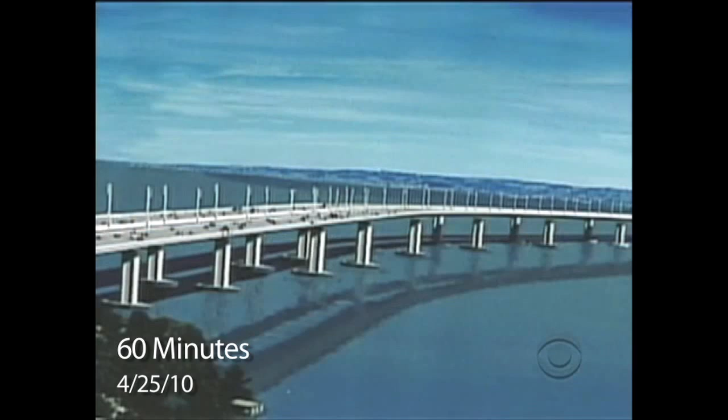Help me understand why it was so important to people here that the bridge look nice. Whatever we built out there would have to meet very exacting seismic standards. Whatever we built would have cost billions of dollars. So why not build something beautiful? Why not build something inspiring?

That's what we're here to talk about tonight, ladies and gentlemen.

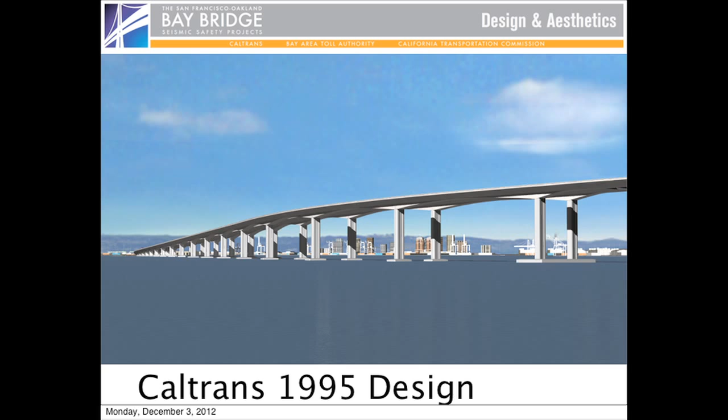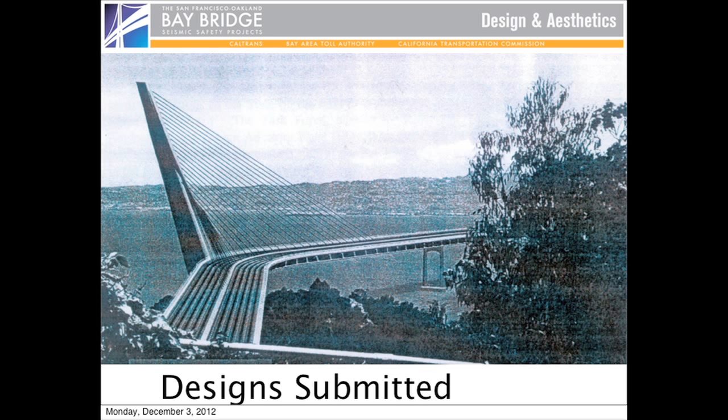Caltrans started getting a lot of designers submitting ideas. This one is from a professor at Berkeley. A lot of the designs I'm going to show you, it's okay to chuckle if you want to, they're kind of funny, but most of them did not work structurally. This one is a very interesting design, but would never work in a high seismic zone.

This is not an alligator, by the way. I think that's Yerba Buena Island. And so I don't know what to say about this one. So we could go to the next one.

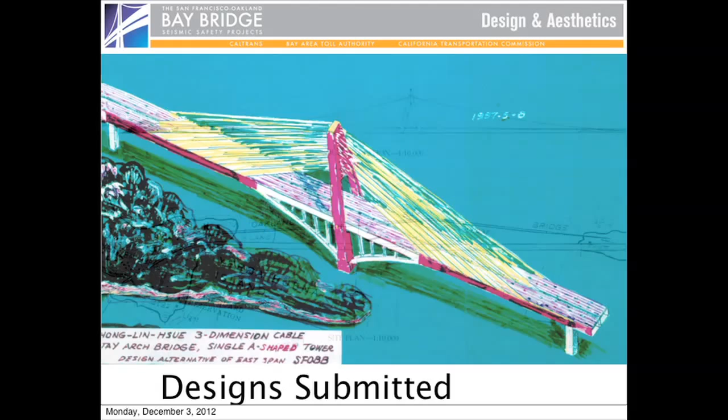This one was very interesting because the designer wanted to put a single tower in the middle of the bay. This is Yerba Buena Island, and this is the west span over here. It's a great idea, but one of the reasons why we have the main span, as you'll see, the main span is right about here, is because the profile of the geography in the bay basically drops off to about 500 feet, and the soils are basically the consistency of motor oil.

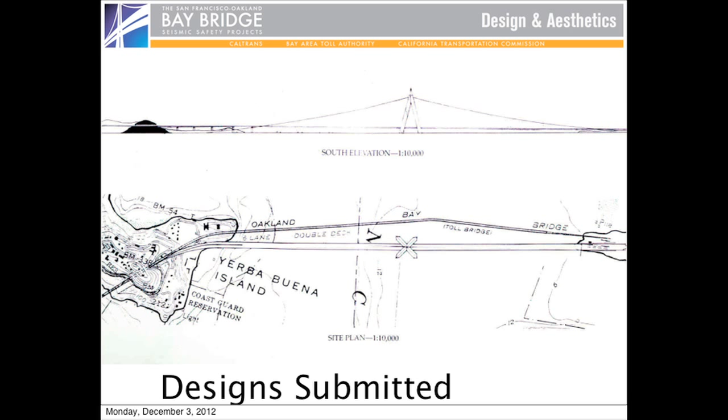The reason why the suspension bridge doesn't go all the way across is because of the geology. The rock profile drops off here, and the main tower is supported in that bedrock. That's one of the reasons for one really large span. A lot of people ask why there wasn't more spans across the bay, and it really has to do with geology. There wasn't really geology to support a mega structure like this. It is actually a nice design, but the geology wouldn't work.

And so Caltrans, we can go to the next slide. Caltrans set up an Engineering Design Advisory Panel, or EDAP. And EDAP came up with 17 recommendations that the designer, whoever Caltrans was going to select, had to satisfy.

I didn't list all 17, but the main ones were that the designer had to have 2 independent designs going on, a cable stay and a self-anchored suspension bridge. Also had to have 2 separate decks. The bridge didn't have to have pedestrian access at that time. Had to be a lifeline structure, which meant within 3 hours after a major event, service vehicles like fire trucks, ambulances, all those sorts of things needed to be able to drive across the bridge.

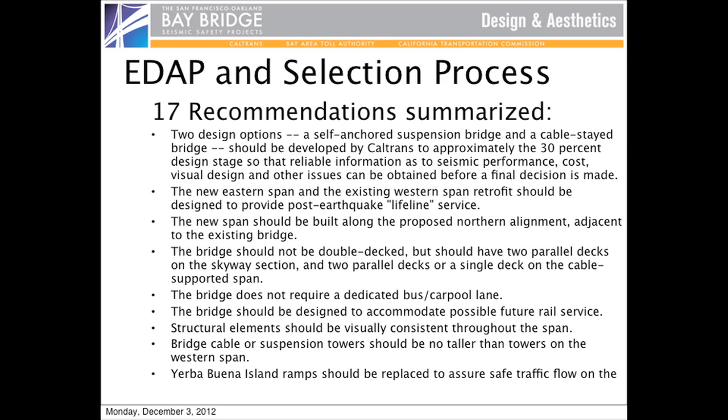It had to be operational after a high seismic event. And the bridge was going to be built to the north, and it also had to accommodate future rail. A lot of people don't know, but the existing bridge was designed in case BART ever went across - it's actually designed to accommodate BART if it needed to be.

How did it work? Well, it's very interesting to know that in 1997 and 1998, when all this was going on, the idea of having architects work on a mega bridge project in the United States really didn't happen. Engineers really liked to have the engineering process that they liked and not have architects come in and kind of muck up the process, and we heard that a lot.

But the way that Caltrans set up the whole process was very context-sensitive design. The Federal Highway Administration had created a program called context-sensitive design, but the Bay Bridge process actually preceded that. What it was is we would have landscape architects, engineers, geologists, lighting designers, environmentalists, all working together to find a solution. A lot of the times, the different professions, the different disciplines had very different ideas of what should be done. And so it became a very interesting process.

The architects, we would come up with some of the crazy things you saw in the beginning, and engineers would come up with things that were not very exciting. And so we were in a constant battle back and forth on how do we come up with the aesthetics.

What I'm going to show you is actually now the development of the cable stay bridge. I'm going to show you from pre-proposal, before the RFP was released, through the proposal images and up to 30% design. So if we can go to the next one, please.

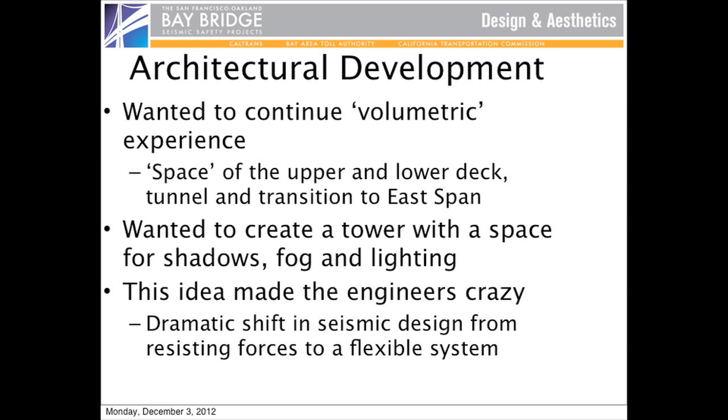I wanted the cable stay bridge to have an experience. If you're driving on the existing Bay Bridge from Oakland into San Francisco, on the top deck, at first you're on the deck, then you're in the truss, then the main span truss, then the tunnel, then the space of the main cables—it's all very interesting. It's a perceived procession of spaces. Going from San Francisco to Oakland otherwise, you're basically in the space of the truss the entire time. You don't really have a great view. Then you're in the tunnel, then on the bottom end of the truss. It's not great. So I wanted to create something that created space.

That was very interesting. I didn't know how that was going to happen. And I also wanted to split the tower so that it had space for shadows, for light, for different effects.

So do something else. And I have to tell you, when I said this to my engineering friends, that we wanted to split the tower in a high seismic zone, the back of their heads popped off. It completely went against all engineering philosophies, where up until then, all structures, especially in California, were built to resist earthquake forces. They're meant to be robust, not flexible.

So what we started to do is we started looking at these things—I didn't know what a ductile link beam was, but the engineers did—coming up with ideas of having these link beams that would allow the structure to be flexible and move. One of the many spectacular things about the Bay Bridge is that it's designed to move and to break, predicting where it breaks in a major event. It's not made to resist everything.

And so from that idea, if we can go to the next slide, these are some of my earlier sketches. I was working for a firm called H2L2 Architects at the time, and if you see the date here, it says December 5th, 1997.

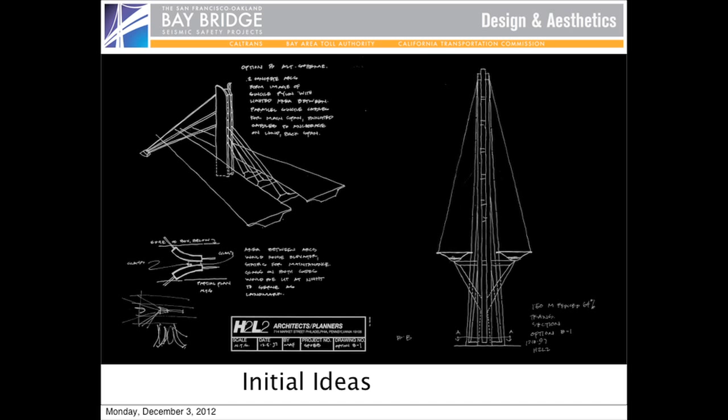This is some of my first sketches on the idea of having the cables in the back span go to the outside, the cables to the inside, and the front go to the inside. This is the west side, this is the east side. So when you came out of the tunnel, you'd be in the space of the cables and they would transition to the front. This idea then translated into something that was split.

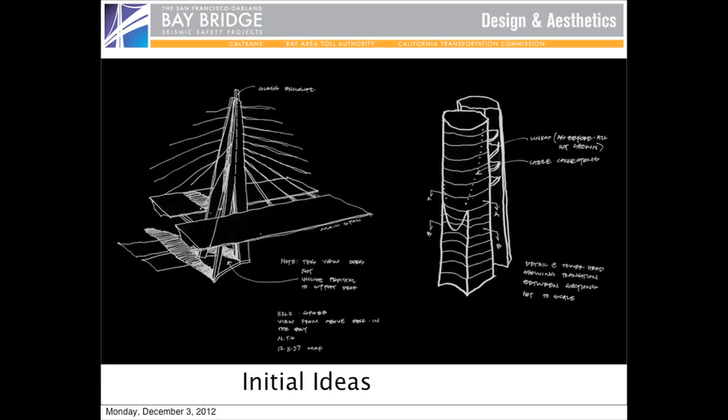I split the legs actually. Can we go to the next slide? The back of the tower had these legs that opened up like this—again this is the west side, this is the east side. The cables came from the outside to the tower and then back into the inside.

I was looking at a lot of different ways to sculpt the tower. These are some early sketches where we were showing some of the link beams, and we had the two halves, shaping the concrete and doing some really interesting things with it. Again, this was a whole six days later—I went from that one sketch to this other sketch, and there's a bunch in between. Can we go to the next one?

How am I doing with time? Am I doing okay? Yeah.

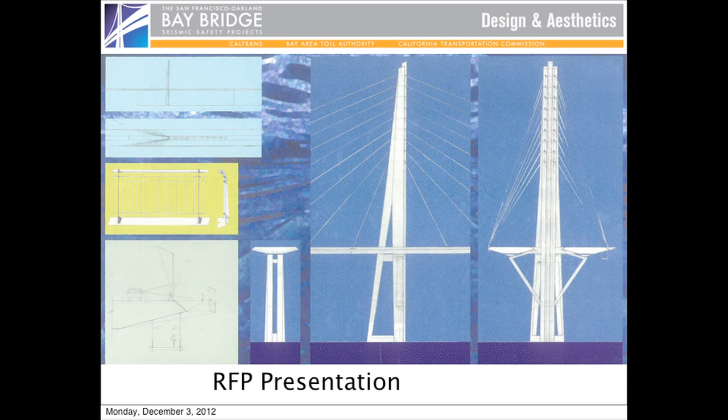Okay, good. So these are actually not many people have seen these. These are actually the presentation boards we used to show to Caltrans when we were presenting our qualifications to be the final designers of the Bay Bridge.

That earlier design developed into the main span tower. This is longitudinal, as if you were driving across it. These are the skyway piers. They were doing studies on where to put the pedestrian path. At an early phase, we were looking at putting it below deck, at deck, or above deck. Don and Clive will talk more about that later.

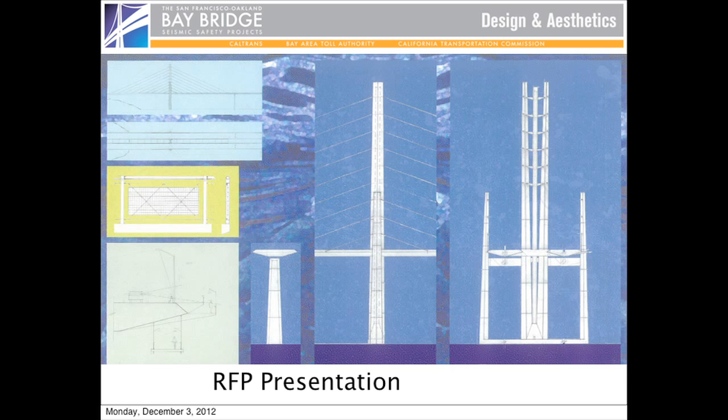So this is how that split tower developed. There's two smaller towers on the outside, two taller towers on the inside. We were playing with different cable arrangements and different things. After that, we were awarded the contract, and we started working on the design.

One of the things we wanted to do is this one, called a portal frame. This is the old engineering, where this structure was designed to resist earthquake forces. It's a very robust structure with 4 planes of cable, with cables from each tower, and each roadway supported independently. It's very robust, but not very attractive. When you have 4 planes of cable like that, the views are distorted, and we felt it wasn't all that great.

You guys have to remember, these graphics are from 1998, so this is a long time ago.

The one I showed you earlier with the split legs, with cables to the outside and then to the inside, those 4 legs — our engineers started looking at that and putting it in a computer model, and it kept blowing up. It did not work at all. The earthquake forces — it just didn't work. So the engineering team said, go back to the drawing board and come up with something else.

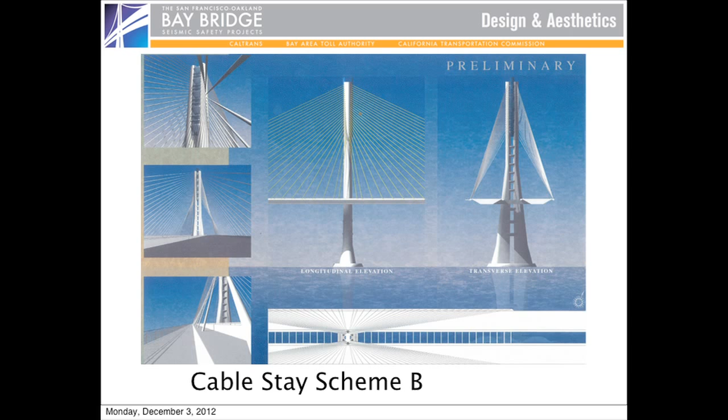So what we started developing was the central tower, and it did what we were looking for. It had the tower in the center and cables to the outside, creating a very dramatic effect. In the very beginning, I always call this one a ballerina with really fat ankles — it's got really chunky proportions, but early on we don't know a lot about the behavior, so the structure is often bulkier and not that graceful.

Thank you, I agree. And then can we go to the next one, please?

This is actually one of the models you didn't see out there. This was the first model of the cable stay like this, and at this stage the ductile link beams were up here, more architectural — they weren't really functioning at all. I had a concern about having these link beams exposed to the elements, out in the rain. So we worked on creating this glass enclosure at the top to close them in. It could be lit at night — really dramatic, really cool.

I remember the press and everything on SF Gate — people were afraid they'd be driving across it in an earthquake and the glass would fall out. I was always like, well, you're not afraid of that when you're walking around the streets in the city, when there's buildings with glass. You know, that doesn't happen.

But that's a model you didn't see out there right now. Can we go to the next one?

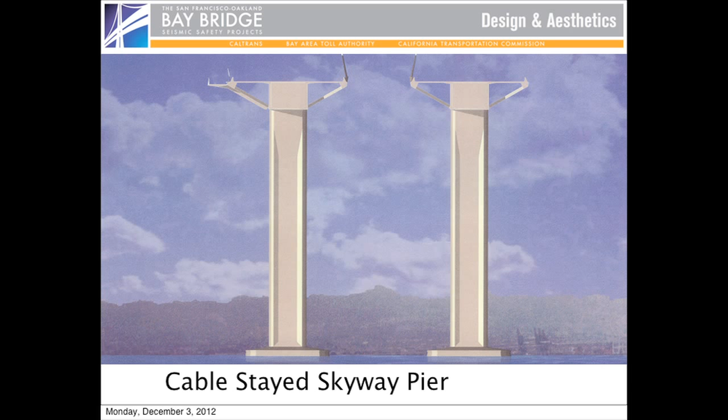We're also developing the Skyway piers, and this is very similar to what the Skyway piers look like today. And then this was the portal.

And we had some reveals along the outside of the concrete that could be lit and create a lot of excitement that way. But in the end, can we go to the next one?

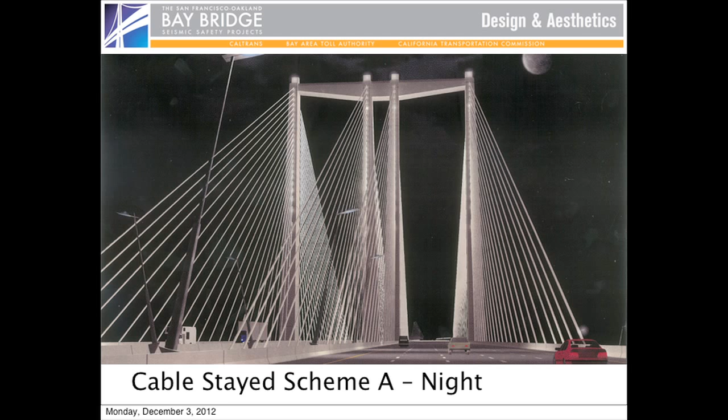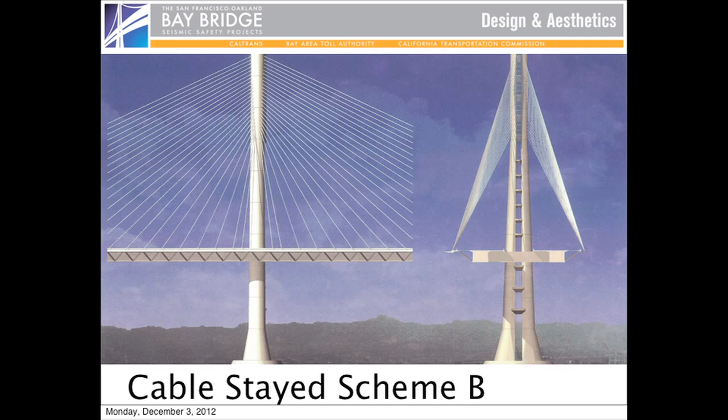There's some night views. So in the end, this is after the central pylon got developed a lot further - you can see how much more slender this is. We started playing with some diagonals, bracing on the exterior. It got a lot thinner. The performance of this tower was extremely efficient, very, very efficient. And this is what it looked like from the deck.

In the very end, we submitted 4 different designs. We had the portal design - let's go to the next one. The self-anchored suspension bridge had another portal design as well. We'll go to the next one. We had the single pylon, and then the self-anchored suspension bridge.

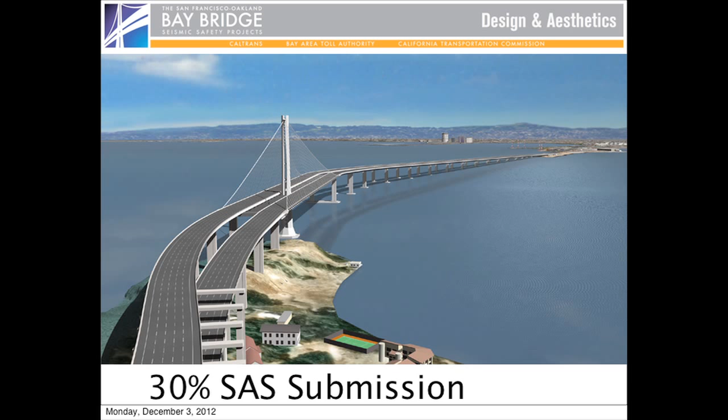And ultimately, at the last - am I almost done? Yep, okay, I'm going to be done now. I didn't even know you snuck up there.

So I'm done, actually. Don and Clive are going to continue talking about the self-anchored suspension bridge. I just wanted to show you a little bit about the early development.

Thanks, Michael Fitzpatrick, for taking us back down memory lane with some of those early designs. First of all, parents, thank you so much for bringing your kids out tonight. Tonight is actually historic - we haven't looked at some of these designs in years. Like I said before, those models haven't been unearthed for a decade. We're kind of retreading some old ground to bring back the Bay Bridge story tonight because we know we're just a few months away from opening this amazing span.

The next 2 folks that are coming up are going to speak specifically about the bridge that was actually built and how we came up with that design. With no further ado, I'd like to turn it over to Clive and Don MacDonald.

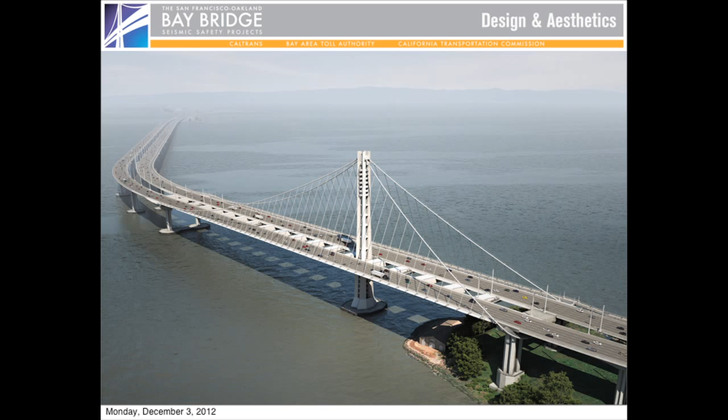Here you go, and I think this is a good overview of the whole bridge. It was from touchdown to tunnel - that was the idea, to make the bridge read as one piece. There's 5 different parts of this bridge, and those 5 different parts had to be all sort of read as one bridge. So we've done it by the light poles, the tower, and all the solids and voids that are in here.

What's really interesting in design when you design bridges - and I use the Golden Gate as an example - is that the deck's usually about 1/3 of the height of the tower. The reason that's done is when you put the deck in the middle of the tower, it cuts it in half. So this started off with a very good placement of the deck. Throughout the design, you'll see there's 1/3 of the elements at the top, and 2/3 down here - they're not grouped the same way. It's like when you take a photograph and put the horizon in the middle, it splits it in half. This way, it reads as a unit that's harmonic with its total.

In the design, all the elements are interrelated. The 4-legged tower was set up because we wanted to get light through the middle of the tower to break it up, to break the massing down. So we had the slimmest tower possible, and the same with the horizontal elements, to make them very slender. So it's a very small, minimum impact on the environment.

So that's the next slide - this is an animation. Just talking you through it: see the touchdown at the tunnel here, it goes across, the deck splits into 2. Part of the design guideline was to have decks parallel to each other, and then a single tower came out of it.

You can see the link beams that Mike was talking about, and the solids and voids that are matching up with the tower and the deck. Here you can see the pieces of the tower have redundancy—the tower top and link beams are covered with elements that are bigger than what's actually needed, and there's no structural need for it.

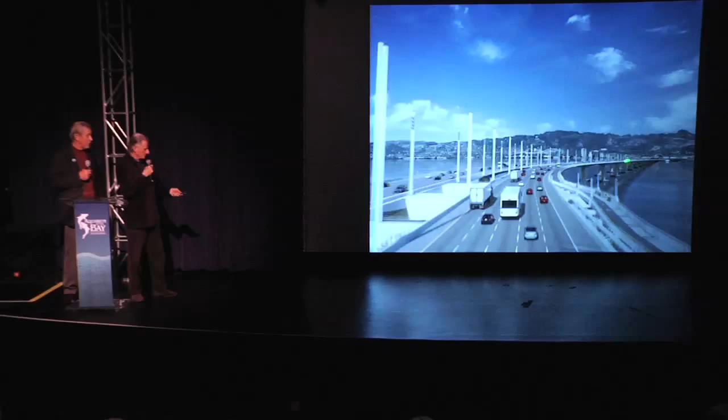Here are the light poles that come into the spread-out cable system, and it's really important that we wanted them to read as a strong line, because it's a design technique we used to get the bridge to read as a unit. Howard Brandston in New York had done a lot of that layout. Here's the added-on bike rail that we put on, and there are a lot of interesting elements on this—I'll get to it when we see more detail.

We tried to center everything on the piers where we could—belvederes, the light poles, and all the elements in the handrail relate to the elements underneath the deck, like cantilever arms. Also, on the piers, the corners have pentagon shapes—the same shapes you see on the main tower, and also in the light poles on the bridge. Those are pentagons as well. So the idea of carrying this vocabulary throughout the bridge has been very important.

I want to first appreciate everybody turning out tonight. You've heard from Michael, and you have Donald and I up here. There's another architect who worked on this bridge, Jay Mirza, that I want to recognize. He worked with us early on the design, not early with Don on the self-anchored suspension span, but he was very involved as the bridge evolved over the first few years, including early on in the skyway portion, which wasn't received very well by the Bay Area. I certainly want to recognize Jay.

Don and I have done a number of these presentations before, so we kind of go back and forth, and I hope it works pretty well for everyone. So, the game plan, if you will...

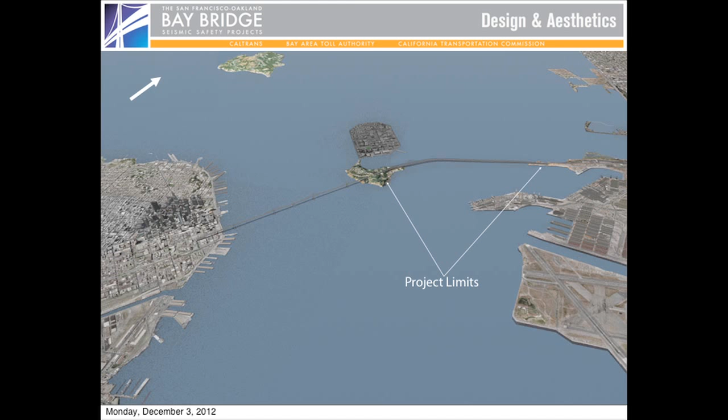I want to take you on a journey across the bridge, and Don and I will do our best to familiarize you with and explain how all these parts come together that Don's been speaking about. I think we all know where the project is—Michael explained it pretty well, but we want to take you on a journey across the bridge. We'll talk about the suspension span first, then the skyway portion, and by the time we're done, you'll have a pretty clear understanding of how this bridge was put together, not only structurally, but how it was shaped and architecturally designed.

We start with this great picture of the Bay Area, showing the rich history of the Bay Area bridges, with an image of the self-anchored suspension span in the foreground, the west spans here to the left leading into San Francisco, and the Golden Gate to the west. The point of this slide is to talk about—Michael did a great job explaining some of the early designs we looked at in the design process—but how did we really get to the self-anchored suspension span? Don, maybe you want to get into that.

I think what's interesting is that there's a necklace of bridges here, and they're catenary forms. A catenary form is like if you hold a string between your two fingers and give it some slack—that's called a catenary form. So we have this element that ties all the bridges together as the main thing. The other thing is the tower height is the same as the tower height on the west spans, and the idea behind that was to tie that in as well. So it's a good way to see how important this bridge is. Part of what we're pushing lately is the fact that it becomes a bridge for the East Bay, particularly Oakland—we'll get into that a bit further down the line.

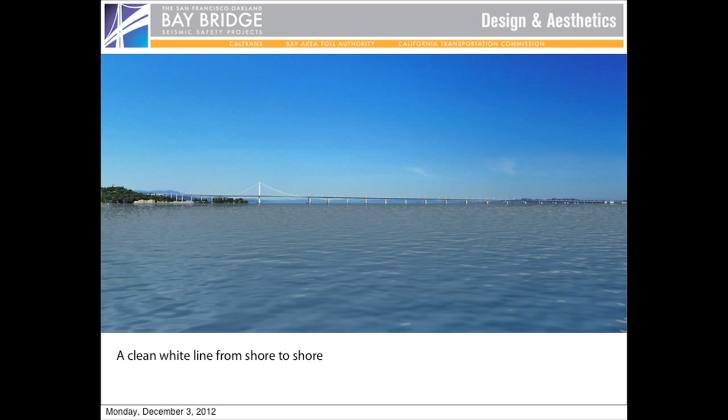This is about the horizontality and the vertical tower. If you look at nature, basically everything's horizontal—horizons and trees are vertical, even buildings—so there's a certain nomenclature that exists. The other interesting thing is this bridge rises: the deepest part of the underside of the water is at this end, and it rises from there, so it sort of mimics what's underneath it.

And this tower was moved earlier in our design to be over a better rock bed that's underneath it. These piers that go down, they go down about 300 feet in stiff mud. I think we have slides that explain that even better, why the tower was moved where it is.

I want to mention just the bullet down below. A clean white line from shore to shore was always kind of a design parameter for this bridge from day one, to create this clean white line from shore to shore. So that's been the challenge architecturally.

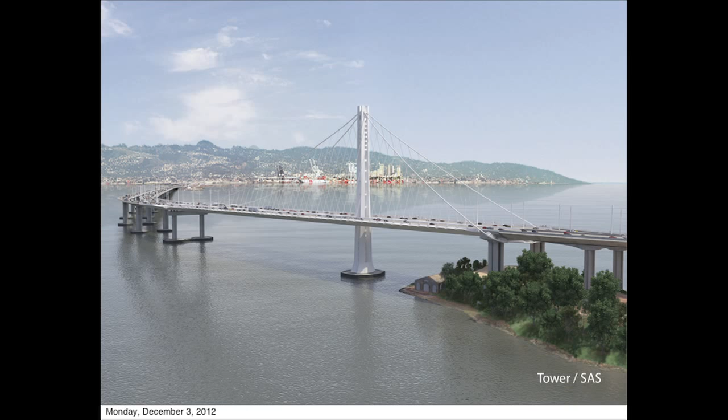So this image is to talk then, we're going to start with the tower. A great image of the tower to explain to you how the tower evolved into the shape and form that it is. Not only the tower itself, but the catenary form of the suspension span. So Don, you can speak to this slide and probably the next few.

I think the idea, as I mentioned earlier, was to set up a vocabulary for the bridge. One of the ways we do it is we take the tower in this particular case, which is the most complicated piece of engineering out there. I worked very closely with Herb Rothman. He and I together created this tower. I would do a sketch and I'd say, Herb, does this thing work? And he'd say, yeah, let's go with it. That evolved from other designs you'll see in a minute, other sections through the tower.

The other thing that's very interesting about this is it's a self-anchored suspension bridge. The forces come down the cable, go into the deck, parallel to the deck. There's two components, a vertical and a horizontal vector. When you get down here, the vertical drops out, then it goes into compression. On the back, they couldn't get that design completely on that system, so they weighted it down with concrete. The element below it is to hold it in place in case of an earthquake. So you can get an idea that this is balanced, even though the distances are different.

The other thing is it's about a 1,000-foot span, and that's a span you need for boats, ships, I should say. If you make it any smaller, then only one at a time can go through it. So that was another reason the span was important.

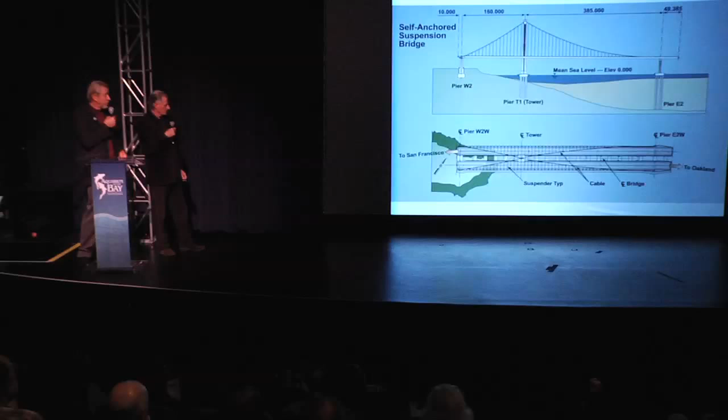The other important thing you see here is that the bridge, as it is in the current design, is asymmetrical in form. Early in that design process, the single tower suspension span was symmetrical, Don, as I recall. Right. And we moved forward with this design. I think it's a good point to bring up EDAP, which is a committee that was our peer review panel. They suggested we move it back. It'd be a more dramatic form, but also it'd create a foundation that was more stable.

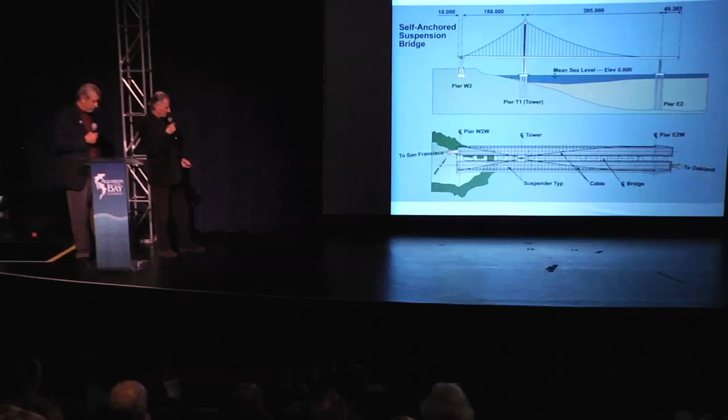Out here, as I mentioned, these piers go into stiff mud. They go down 300 feet. And there's an old riverbed out here, and that's why it has a different configuration than the more shallow place. Here you can see how it hits the island.

This is just cut off, but the earlier designs, the reason we had two towers to begin with was the idea was to set the elevation on this one lower than this one, because when you go off the bridge, they wanted the roads to come together, and they wanted to start that difference in the bridge.

So that was one of the reasons we had these 2 towers in the earlier designs. We did about 15 different tower designs and about 10 cable systems before we came up with this final solution.

Next. I think what's interesting is once they moved the tower back, it picked up the cranes in Oakland. The cranes are white, and this is actually a catenary form. There's not much of a curve in it, and then there's a backstay, and that sort of repeats its shape in the main span of the bridge.

I think it's really important that these were painted white. I called up the maintenance people and said, why are they white? And they said, because if there's any rusting that goes on, we can see where it's going to happen. And this is the thing.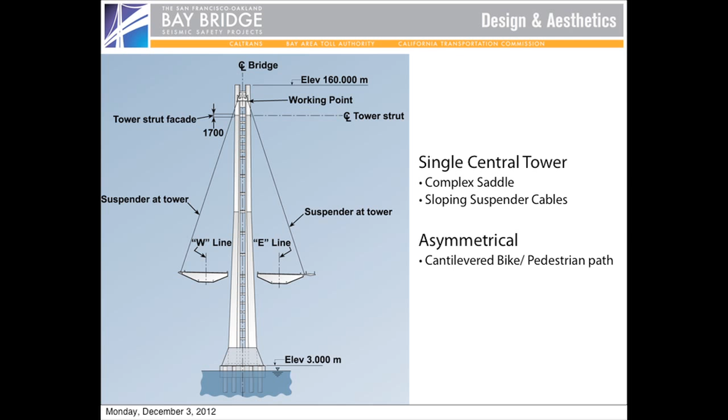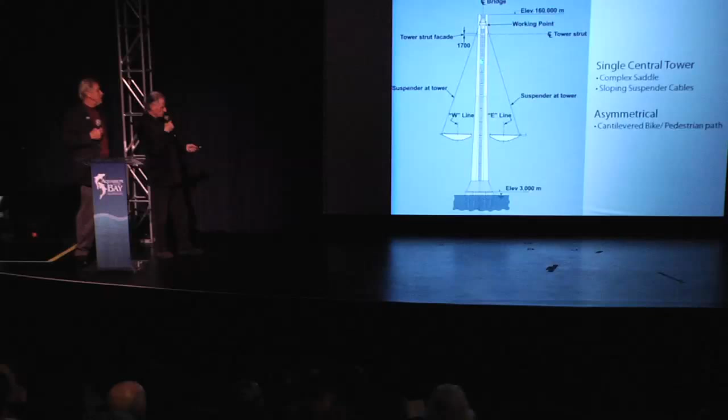Now, I was saying earlier, there's redundant parts on here. The tower top is redundant. It was a termination we designed. And here, these are link beams. These are the actual size of the link beams. They're actually, the covers are actually 2/3 bigger than this. We felt the proportion was so small it wasn't significant, so we enlarged them. And then we added a few more down here and a couple at the top.

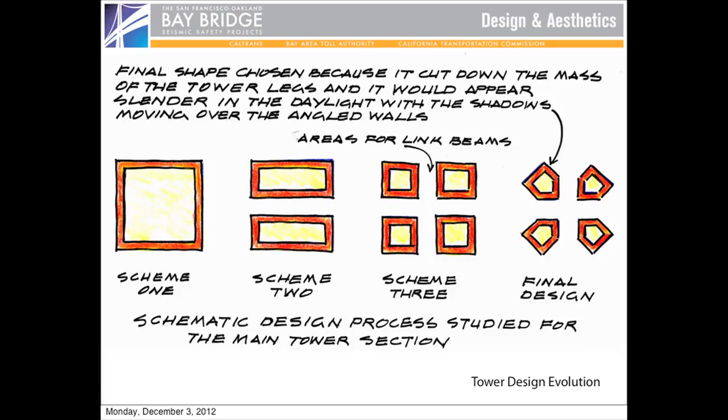Now here's the process we went through. When we first started, we had a sort of square tower. We actually had some in concrete. Then it got split into 2, like Michael was saying. They started looking at 2. And then we got it into 4. And then I felt at the time it was still too big and clumsy, so I started cutting the corners off. And again, I turned to Herb after I'd done the drawing. I said, Herb, is it going to work? He said, okay. So that's how it ended up there.

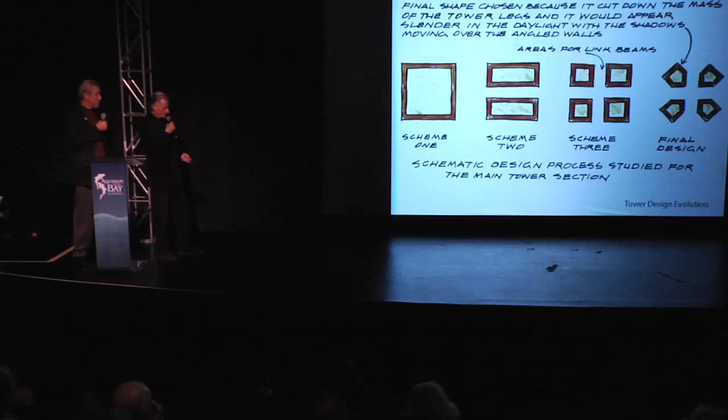Next. These are the kind of drawings we do, by the way, when we work with engineers. We rough them up, sketch them up. We don't do computer drawings till they sort of decide what they want, and then we go into 3D and fly-throughs and all that. But this is a process we've developed in our office over the last, because of the Bay Bridge, 15 years ago. And we even carried this faceted form into the railing design of the bike path, which we'll talk about shortly.

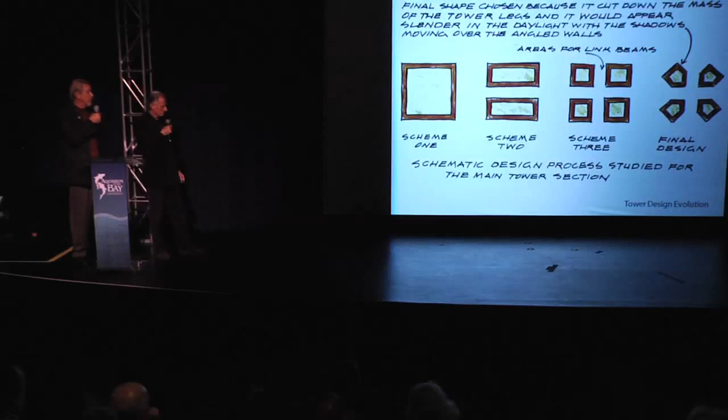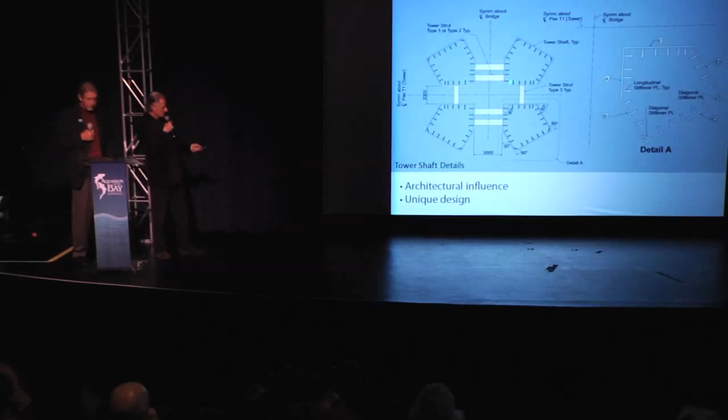This shows you in detail how this is the tower leg itself. These are the link beams, or struts - there's different names, we call them link beams. And these are the outside skin, and these are the stiffeners on the inside of the tower. So they're hollow, and they're tapered as they go all the way up.

And the reason we tapered the tower, not just for structural reasons, but if you look at the Golden Gate Bridge, or many of the famous bridges, the towers always taper as they go up or they step up. The reason for that is when your eye looks at 2 parallel lines at great heights, they sort of spread out because of the optical aspects of the lens. So the idea is to try to pull it in as it rises, and that also makes it look higher than it really is.

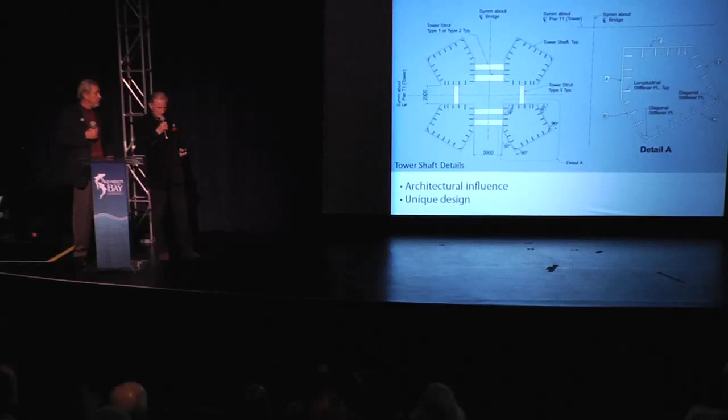And I just add to that, since we're talking about Don's sketches, as I work in the day-to-day kind of design theater, if you will, of this bridge, because it feels like theater a lot of the time, there's times where we're trying to convince our engineers. And I can't say enough about toll bridge design, the engineers I work with from Caltrans, from our consultants, from our partners, MTC, CTC, and I really mean it.

It's just a great team of people to work with. It's like a family after 16 years. I don't know if it feels like a family to Don, but some of my family is here. They would probably agree that I spend too much time with this family instead of at home.

My point earlier was that there's times we really do want to drive home a point, and I call Don, and Don and I meet on a weekly basis, and I say, Don, I need a sketch, man. And he cranks these out pretty fast. So it's a great part of our dynamics, if you will, and it's very productive.

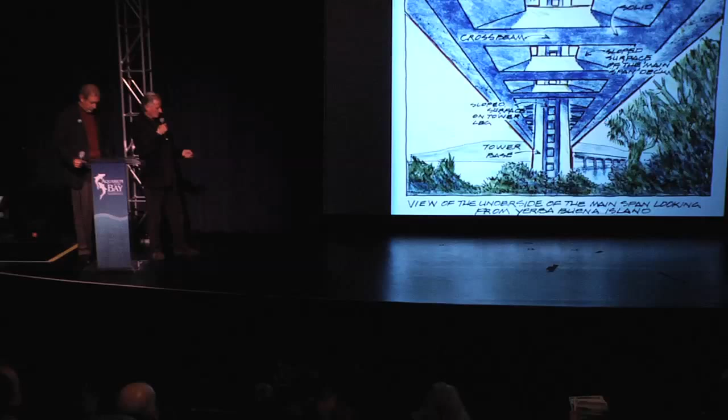Now, this is an important part. Remember I was saying earlier, I'll talk in some detail. These are the rods that come down and tie this back part of the bridge. All it does is stabilize it in case there's an earthquake.

The other thing that's quite interesting, Bart alluded to, is that this bridge has a lot of innovation. This is the first cable that I know of that wraps around the bridge itself. We pulled the bike rail off so people could look at how the cable goes into this saddle. There's a saddle here, another here, one here, one at the top, and then two more on the east end of the anchorage.

We also lifted the bike path up, so there's an airspace underneath it. The theory was that when winds come in and blow, they'll go underneath and around it, like an airplane wing—this sort of looks like a U-2. The idea was to get that path separate from the autos, because there's a tremendous amount of cars, and car exhaust is heavier than air, so we felt it'd be some treatment. We don't know if it'll work, but at least we're going to try it, and it's the first time I know it's been done.

This is the tower again, and the link beams, and the redundant top, and the covers on the link beams are redundant because you can't see the actual working piece of structure. Here you can see where we used the pentagon on the columns, and there's a negative space here that ties in with the tower. So again, it was bringing the solids and voids together, as you can see, and that helps tie a uniform structure together.

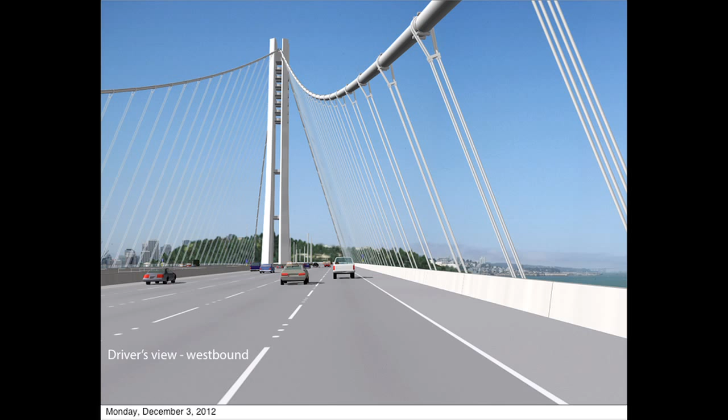Next, you're on a car westbound coming into the tunnel, and this shows you the barriers. It also shows the link beams, and this is the main cable. These are suspenders, and this cable is wrapped, like the Golden Gate Bridge cable. It has 137 strands, each strand has 127 wires, and there's 17,000 total. It's a major feat, and it carries the whole bridge.

Around the tower base, there's a big void, and that's in case of an earthquake so the deck can move back and forth without hitting the tower. It's sort of freestanding here and doesn't attach to the deck, it goes up, and all the forces take place up here and in the base of the tower. Like I mentioned earlier about the tower, why it's so important—here you can see the bike path again, and we'll show you some more pictures.

We have a pattern on it, so the bicycle two-way traffic gets separated from the pedestrian, which is on the outer edge. This is another one, and you can see how the light poles are coming into the sort of open frame. The idea here was to bring these light poles in, so when you're in a car, and you'll see it on the bridge, now they're close enough, so I won't say it's a wall, but it's a transparent sort of white element.

And when you're driving along where you're really next to them, you'll see how this piece goes right into the center of the bridge and the tower.

Things that Clive might talk a bit about the lighting. We've got 7 fixtures on the last light poles, and there's 7 elements up here. So as you go through the light poles, they go 3, 4, 5, 6, and 7, and then that ties it into the top piece. Again, I mentioned we work in thirds all the time when we can. This is a third of the height of the tower, and these light poles are a third of the whole light post itself. We will talk a lot more about lighting.

Let me add right here, kind of moving through this journey, the idea was to communicate how the main tower works, how the main span works, but then once you understand the architecture, that architectural vocabulary, all that is carried into the rest of the bridge. So the point of this slide, the challenge architecturally was that this bridge is made up of a number of different structure types.

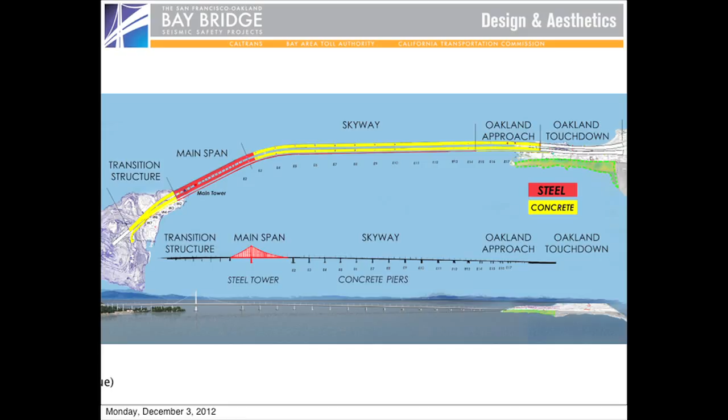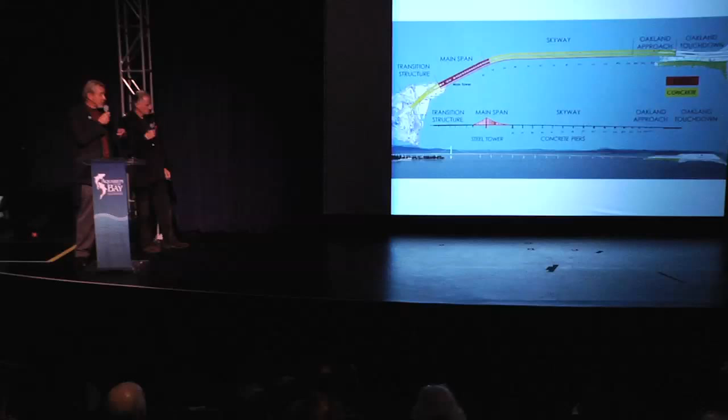This is the steel main span, or SAS, that we just described. Then there's the main approach viaduct, which we refer to as the Skyway, which is actually a segmentally constructed concrete structure. Both ends of the bridge, the Oakland touchdown and the YBI transition structure, we'll talk about those as well, but those are cast in place concrete structures. So the challenge architecturally was to provide an architectural solution that unifies these 4 different structure types into one unified whole. I believe we're going to take an aerial view of the Skyway now.

I think I can talk real briefly about it initially. This is the Skyway or viaduct portion. Again, the first thing you notice is it's 2 side-by-side decks that we've talked about earlier. The thing I want to point out is if you think about the current bridge, it's a double-deck structure, and that was a real advantage to this bridge visually, architecturally, and experientially. In other words, when you're on the existing double-deck structure and you're on the lower deck traveling eastbound to Oakland, you're basically in a big steel cage.

You really don't have views out to Oakland East Bay, and you'll see that in the next few slides. But now with the side-by-side structures, that will afford us incredible views towards the East Bay, as well as to the west when you travel westbound. We looked at a number of different alignments for this bridge overall, and we chose this northern alignment, number one, for geology, for foundation reasons, but it also afforded great views traveling westbound towards the north, Mount Tam, the Golden Gate Bridge, the skyline, and so on.

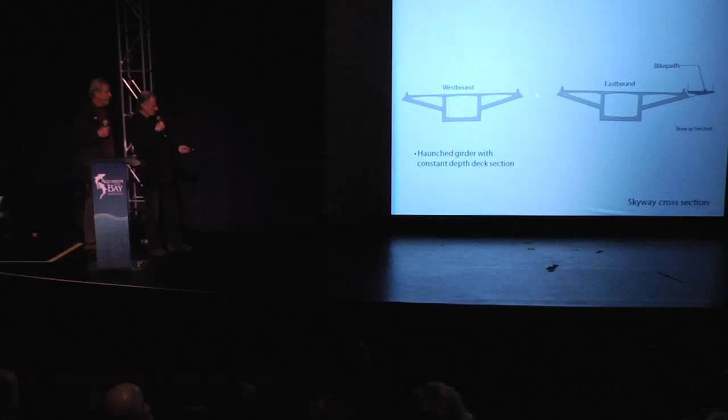Here you can see the bike path, how it's elevated a bit, and it gives you an idea—it's sort of an add-on. On the main span, what's interesting, you can't see here, but they've got ballast on the other side to balance that bike path. So, yeah, here's the pier again.

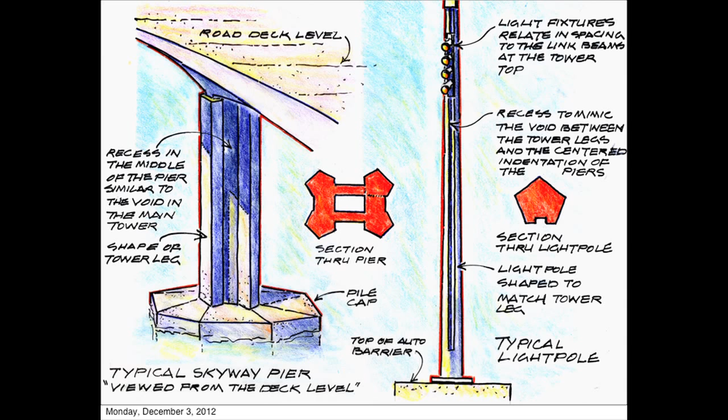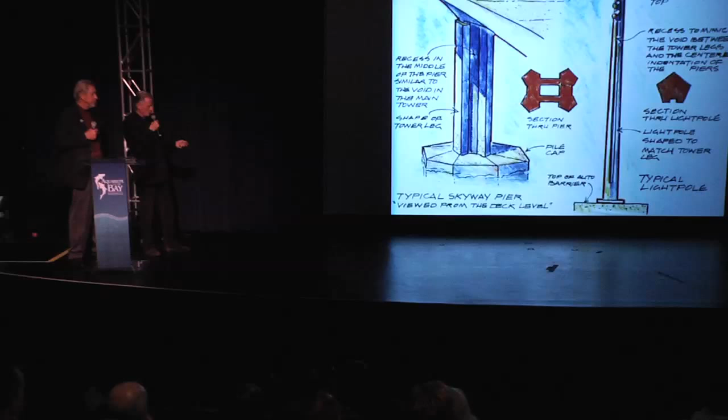Here's one of our drawings illustrating how this works. You can see the shape of the leg, this is the corner of the pier. They're hollow, and you can see the recess that picks up the negative space in the main tower, pointed out over here. This is a light pole, this is its shape - you'll see it if you go out there - and these are the lenses on top. This particular pole only has 4 fixtures, but the final pole, closest to the tower, has 7, like I mentioned earlier.

I just note that we've transitioned into the bike path because you're out in the middle of the bridge right now, and we want to explain a few elements on the bridge, such as the bike path. We'll talk about the lighting briefly, a little about color, and then move forward into both touchdowns of the bridge - at the island and the Oakland touchdown.

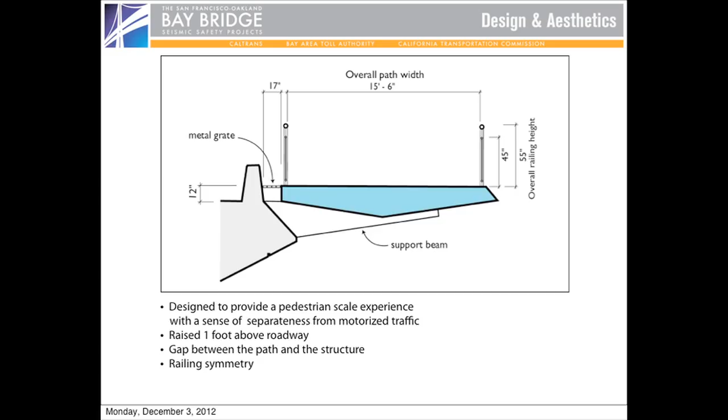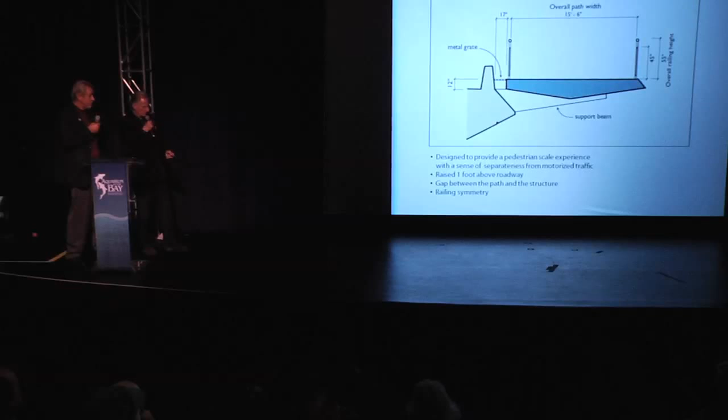And here's the bike path again. I mentioned before how we had this space - it's aerodynamically designed so the wind will come down through it and also go over it. This is also aerodynamically designed - the edge of the viaduct, which matches up with the main span, had to be shaped that way because of the wind.

Another important part of this slide - we saw that picture looking up through the self-anchored suspension span where we talked about the bike path floating alongside. Don worked hard to provide this: there's about a 1.5-foot gap between the roadway barrier and the bike path itself. We also raised it above the deck level to provide what we refer to as a pedestrian scale experience - you're separated from the roadway.

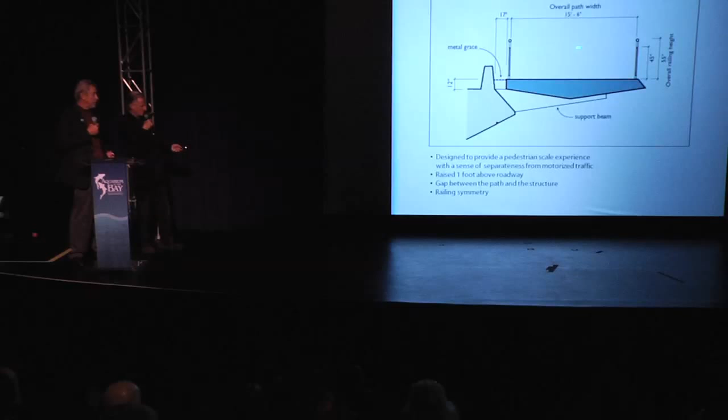And another thing, when we did this, we were going to take it even higher, but the bicyclist coalition people wanted eye contact with cars in case there's an accident or some problem on the bike path. Then they won't feel that they're outside the drivers' overview if help is needed.

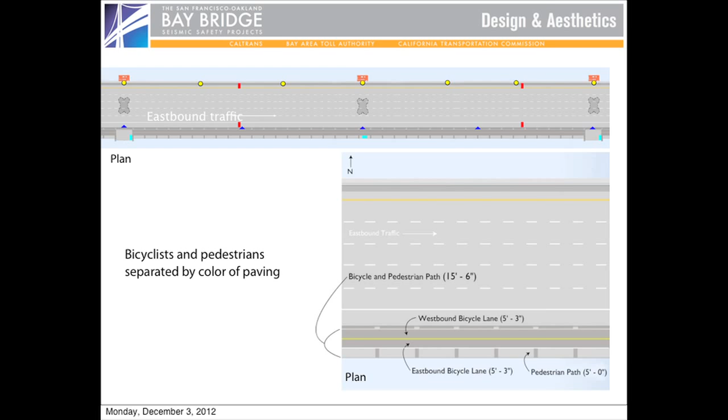This shows you the pattern of the bike path. You can see at the bottom in the lower right part of the screen the two lanes of traffic, and you can see the pattern we use. We put elements the same color as the bike path for walkers, but the bike path has a different scale, and the roadway has another one. You can see the same thing up here. Simply, we're dividing the pedestrian and bicyclist paths by color.

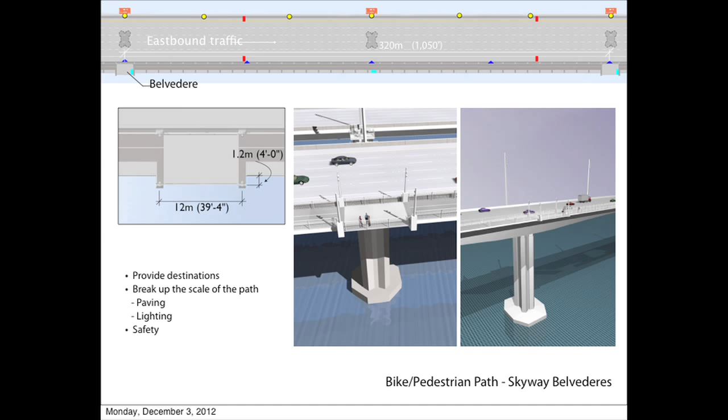This is the belvederes that we've been talking about. Again, you can see the pier shape, octagonal, and they're basically 40 feet long. They break up that long scale of the path.

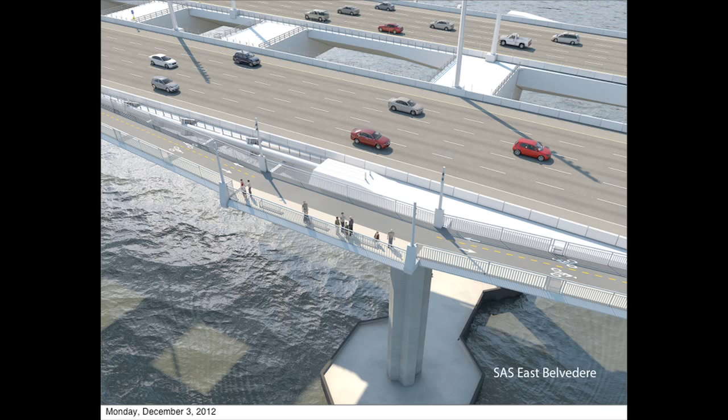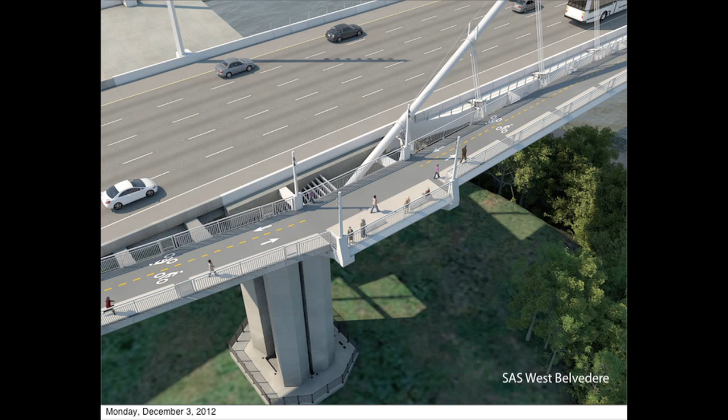This is that belvedere you saw earlier from the underside, and these are the bike path and pedestrian path. This next image is the western side of the self-anchored suspension span, the belvedere. You can see the cable tying through. The cavity's open, and you can look down at the saddle that's in there. We felt that was a good place to put a belvedere, so it could be an area of conversation, to talk about the structure, and a good place to pause next.

This bridge rises almost 200 feet above the water from the Oakland shore. So for pedestrians and bicyclists, we wanted to create a place to pause and rest.

Lighting is an important part of this bridge design, just as it's important how this bridge appears during the day, it's equally important how you experience it at night. Caltrans and the design team recognized early on that lighting was important. We retained one of the foremost lighting designers in the country, Howard Brandston, to design the lighting.

He'd done the Statue of Liberty and other high-profile projects around the country. We worked with Howard throughout the early part of the design - I mention these firms because they were so important as we moved on. We've been working on this bridge's design for a long time, for me the last 10, 12 years, and technology has changed, lighting technology has changed. We started with metal halide lighting, which gave us the white light we wanted, but now with the advent of LED lighting we wanted to move into the 21st century, which is what this bridge is about. So we worked with Musco Lighting back in Iowa, and with Valmont Lighting for the poles. The poles themselves, structurally, are a challenge, and I'll leave it at that for an introduction.

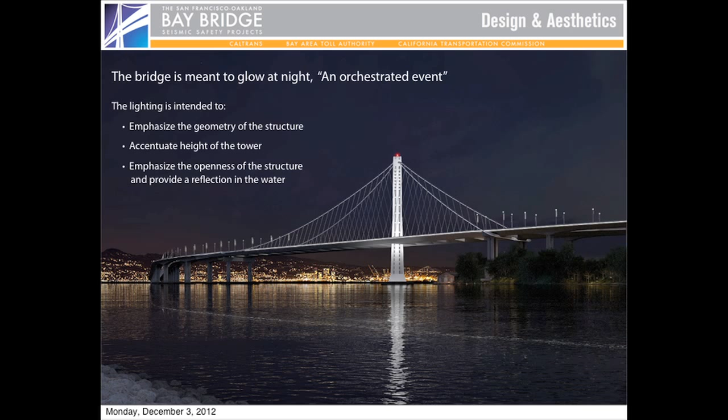Real quickly, the bridge is meant to glow at night, as it states in the bullets. Howard Brandston always referred to it as an orchestrated event, and I'll talk more about that next. But for the self-anchored suspension span, the idea is to emphasize the geometry of the structure, to accentuate the height of the tower and its openness. The other thing about the lighting - and Don, jump in whenever you want, we're a team - is that the idea was... well, I've been on this longer than him.

The idea, very important to the lighting, is that we didn't want to call out the source of the light. We wanted to essentially minimize the appearance of the source of the light. So in the roadway lighting and on the SAS lighting, the lighting on the roadway is downstream of the viewer, and you'll understand that more in the next few slides.

On the cables, the idea was to light the cable at night, so it's like a veil of light. So when you come from the tunnel and head towards East Bay, you really get a sense that you're entering another space in the bay.

We had a test, and we have lights at the base here. There's a light on either side of these four suspender cables that go all the way up. There's marker lights on top, and those are picked up by the vertical lights along the skyway. So you get this idea of small dots that climb up the cable when you come to the end of the vertical street lights, so to speak.

This is an example of the test we did. It was photographed, and we're using it tonight because Musco has been very good at working with us. It's the first time they've worked on a bridge. I work on a lot of bridges throughout the United States, and we're using them a lot now because they're the first ones to get into LEDs. There's been a lot of lessons learned on this, and that's one of the reasons they're so important.

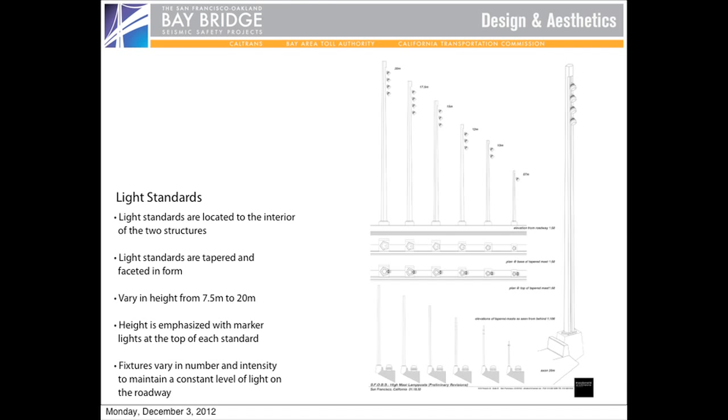This is a good example of how Howard visualized it first - these are his first schemes. We changed this when we went to LEDs. We had to make this seven lights, seven fixtures above the pole, and it went to six, five, four, and three. So when you go out on the bridge, you'll see this count rise.

Like Clive just mentioned, we were able to tie it into the top of the tower, so at a distance there'll be that relationship. We changed this dimension too - when we went to LEDs, we got this to be a third, like I said, of the proportion of the pole, which is something I usually go for in bridges.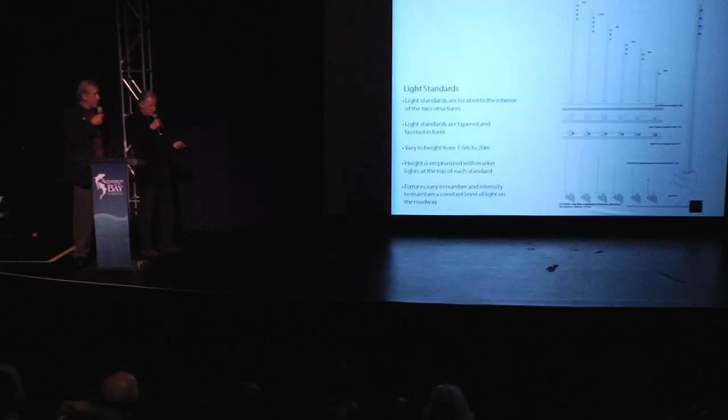One reason I use that proportion is geometry is very important in bridge design. These bridges have to last 100, 150 years. If you get it too stylistic, or you don't follow certain basic aesthetic guidelines, then it doesn't have the longevity that it should.

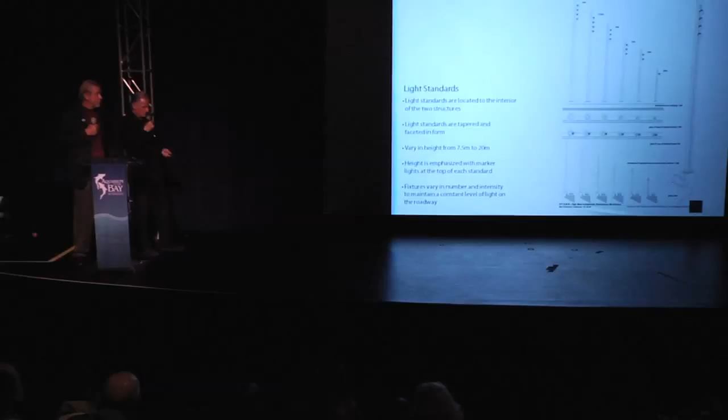Here's another sketch we did to explain how the pole relates to the elements on top of the tower and the link beams, and how the pole - at the time we were having a recess in the light pole - and at the top we had a track that would go up, a way to change the lights. You could bring them down the track and put them back up again. You can see how the recess here, and then the recess between the main tower, were all important elements that tie this together.

I just have to note that the important part was that as technology evolved and we worked on the lighting design, we didn't really need this recess in the pole anymore, but Don and I felt really strongly that it was part of the architecture, part of the vocabulary.

And if you will, we had to convince our team that we wanted to retain this recess. And just real quick, some images of the light poles in the skyway.

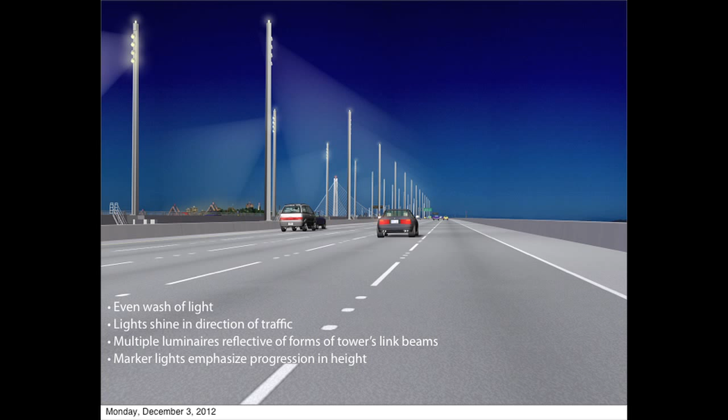When we worked with Valmont back in Iowa, I was fortunate to go a number of times, but I kept emphasizing over and over, you have to understand how important these light poles are to this bridge design, not just at night for lighting the deck, but how important they are during the daytime. They're meant to provide an even wash of light.

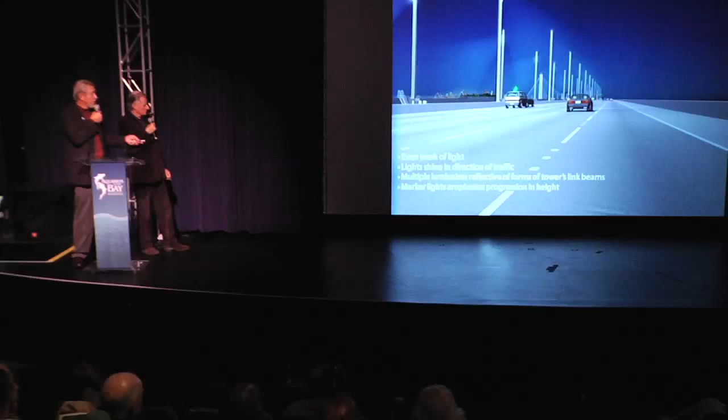You can see that the poles are located to the interior edge of each deck, and the fixtures themselves are actually downstream of your line of sight. I think what's important here is this wall of posts that becomes very important in tying this bridge together, because what happens above the deck is as important as what happens below aesthetically. This gave us an opportunity to really tie it together.

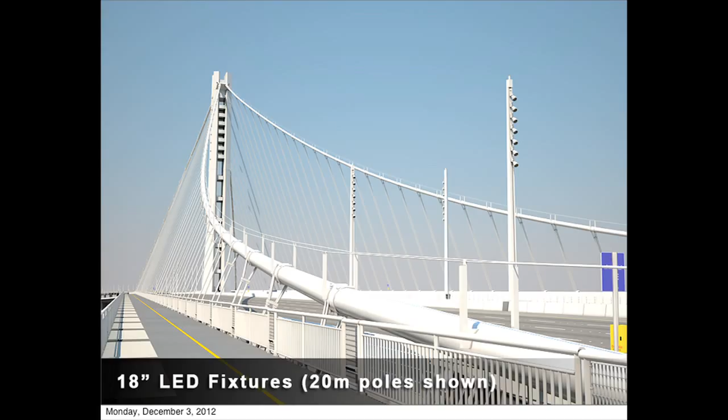Some more of the bike path. You can see the pattern we use for pedestrians and the bicycle. The fact that we have a round rail on top picks up the roundness of the cable and the suspenders, and then these are the collars that go around it, and it's wrapped again. We get into detail if you want, but you can see how we have 7 fixtures at the top of the pole, and then you see the 7 up here.

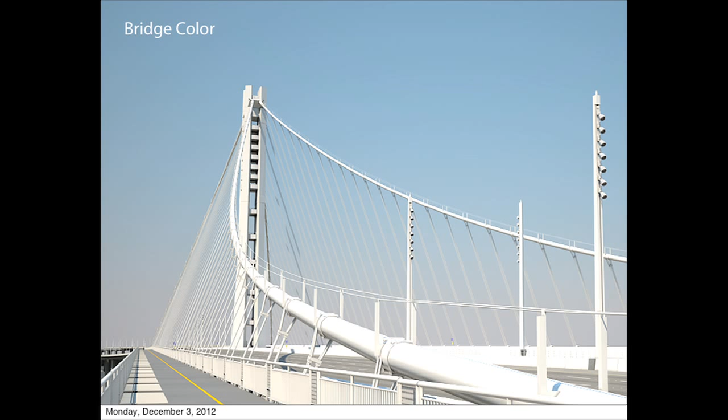The bridge is meant to be white. It's a bridge that was always meant to be a bridge of the 21st century. White speaks to new birth and new life. It also accentuates shade and shadow in the pylons and the tower that Don worked so hard to shape. Another thing to remember, when you use white, it's not a stylistic color. If you remember back in the 50s, you'd get an avocado refrigerator or something like that. If you want to keep that problem out of the way, you go to white or black.

To the cranes - the tower cranes are so evident, there's such a strong visual presence on the shore of Oakland in the East Bay. We're trying to tie this bridge to Oakland and the East Bay, and it really works with that.

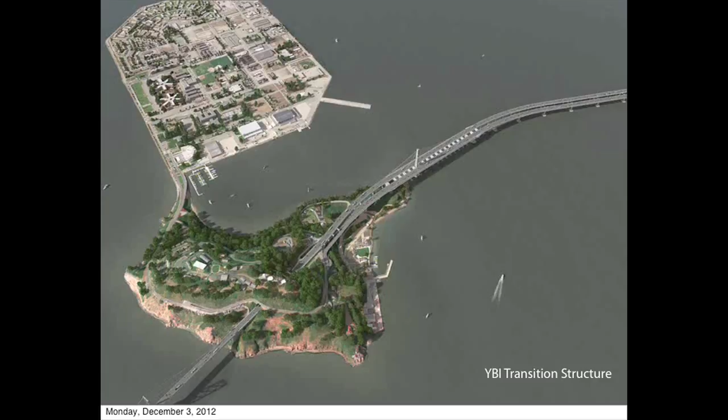So we're at each end of the bridge. We're almost there - we'll roll through these slides real quick of how you connect the bridge at the YBI end, the Yerba Buena Island end, as well as the Oakland touchdown. So an overview of Yerba Buena Island, Treasure Island.

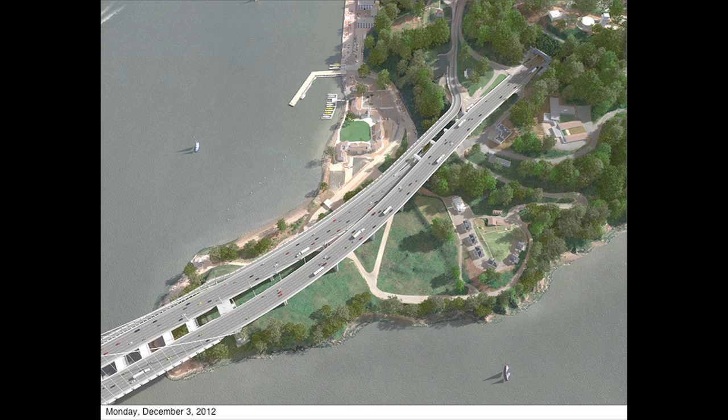This is the transition structure you can see. It's called transition because, remember, we have 2 side-by-side decks that have to transition over each other, becoming a double-deck bridge that ties in to the tunnel at the west spans in the distance. There was a lot that went into the structural design of this bridge.

What this image doesn't show, and I won't get into it, other than to say that we're working with the city of San Francisco to provide a new westbound off-ramp that will take place just after the SAS peels off onto the island, as well as provide a westbound on-ramp.

What's interesting there is it was added later, so structurally it's a very refined design because we had to tie it into the vocabulary of this bridge. And in doing it, we had to go to fiberglass elements and things like that. So it's going to be interesting - it's a very complicated part of the bridge, by the way.

This is the bike path again, to the southern edge. This is where the bike path terminates. So the next couple of slides are going to talk more about the bike path landing.

So this is the bike path as it descends and meets grade. Just as we have belvederes along the length of the bridge, we really want to emphasize this is your first experience with the bridge as a bicyclist or pedestrian as you get off the island and onto the bridge. So it's kind of a staging area, a plaza area, with great views towards the main tower and our new bridge.

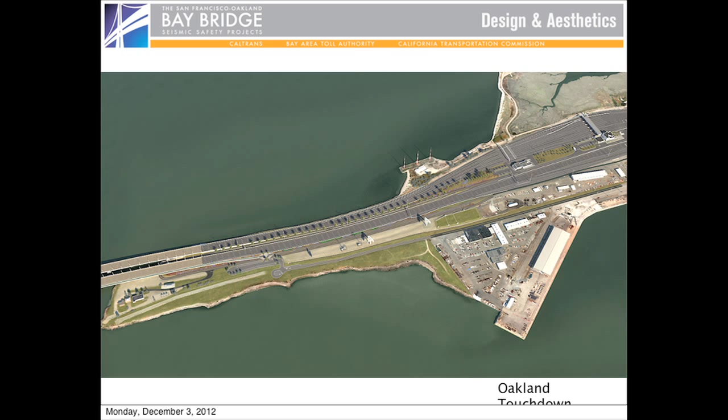I think we'll go to the Oakland touchdown now, we're almost ready to blow through this. This is an aerial view - on the left is the Skyway or Oakland touchdown portion of our bridge as it lands on the Oakland shore. So it's very important how we make that landing, how we make that connection.

You can see the green portion in the bottom of the screen, and I think this was an important offshoot of the bridge design - all the designers, including those in BCDC, DRB, EDAP, recognized that this is a great opportunity to create this gateway to Oakland with a new park at this location. When we started the project, Don and I, and Don before me, this was part of the Oakland Army Base. It was always a refuge area, if you will - I remember tanks running up and down it.

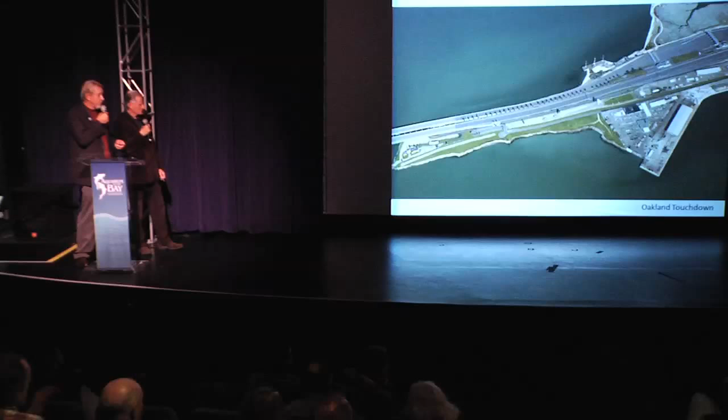We always recognized that we wanted to define the beginning and end of the bridge, and we do that with a line of trees down the median of the bridge. We chose the Canary Island date palm - it's reminiscent of the palm trees that exist on the Embarcadero in San Francisco, so it kind of bookends the Bay Bridge's east and west spans, but primarily they're a vertical element. They pick up on that spine of light poles as they parade their way down onto the Oakland shore. They're very adapted to the harsh climate of the Oakland shoreline, and they're also very transparent because views were important.

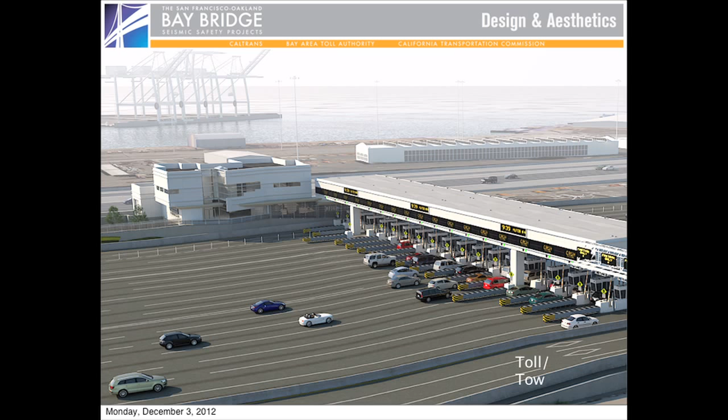This is an example where we're bringing the vocabulary of the bridge into the design - we designed the skin of this building. The interior was not by us, but we had an influence on the canopy, the new canopy, so it has horizontal elements which are very strong in the bridge, but also when you have movement of cars driving by quickly, you pick up that element. So these buildings are all white as well, again creating a whole gateway and carrying through a vocabulary and color that's consistent with the rest of the main span.

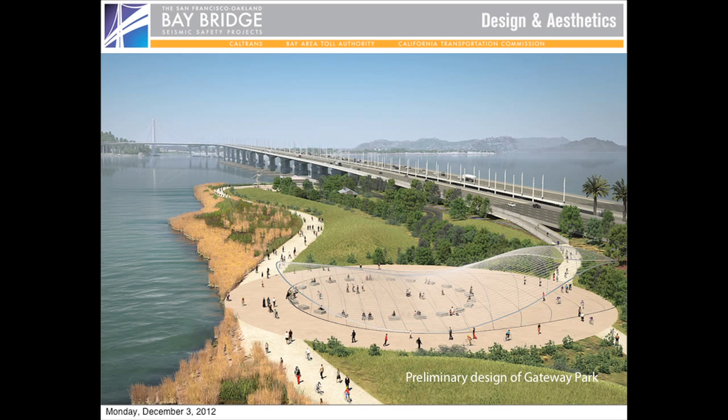So this is an image looking more like a plan view of Gateway Park as it's evolving. You can see we're starting to loosen up the pathways through here, creating a park-like experience. In the next slide, you get an image of how this bike path could eventually peel off to the south and become part of Gateway Park, inviting people onto the bridge, inviting people from Oakland and the East Bay out to this park. I can tell you there are incredible vistas out here to the west, looking towards the San Francisco skyline.

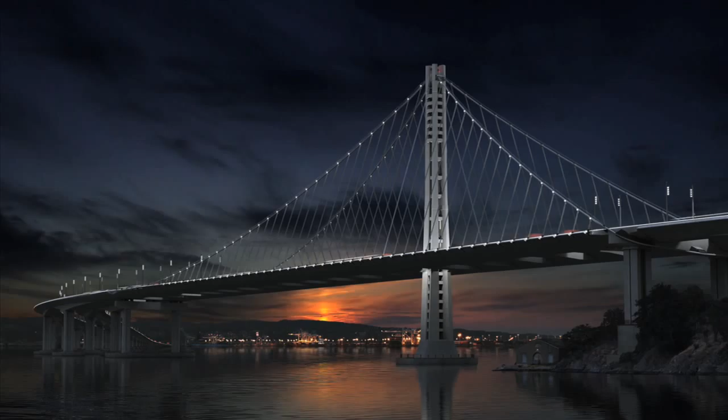I think there's one more slide, which is just a brief animation. This is the way our bridge is going to look - it stops too abruptly, but enjoy it.